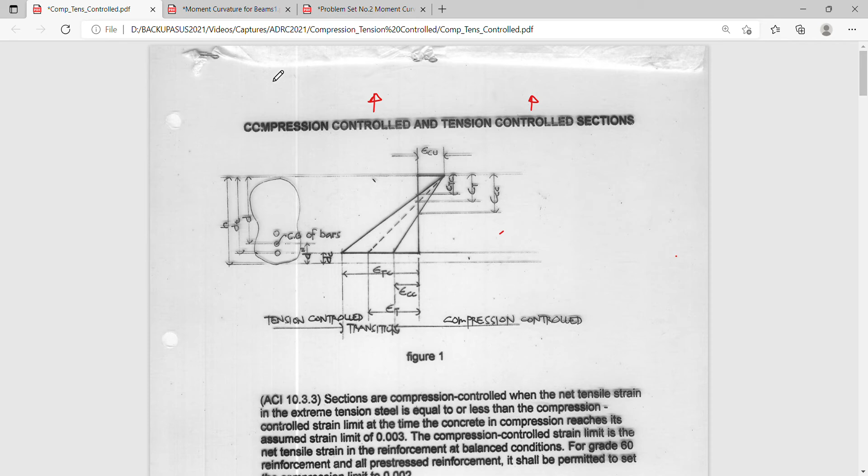So to go into the detail of this topic, if we consider now a beam here, you will notice that I have created three strain relationships in terms of these three lines here, wherein the dotted line here is actually the same strain relationship we are defining in our previous discussion. So this is simply the KD that we discussed in the elastic stage.

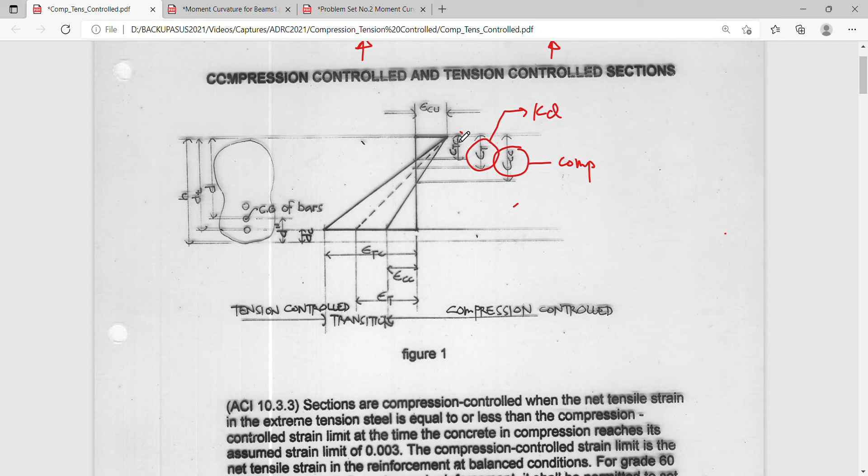But since now we are talking about control, we set aside the use of the parameter KD, since KD only happens when we are on the elastic behavior. So we might as well use the variable C, and the subscript T there simply indicates a control of the tension, the control of the location of the neutral axis with regards to the tension steel provided in the tension region. And we have also the CTC and CCC here, which gives us the basis for our compression control, and CTC as the basis for our tension control.

Okay, so what does that mean? In this particular strain relationship that I plotted now, we see a region of strains wherein the beam or flexural member is controlled by compression. And we also have a region of tensile strain which is controlled by the yielding of the steel. So this is now what we consider a brittle design in our old interpretation of the code, and this is what you call the ductile design in the previous codes that we have studied.

Now, in between, which is this range here, this is what you call a transition. So it's a transition between a brittle and a tension controlled design. Okay, so what does that mean?

In a compression controlled design, this should not happen in beams. This may happen in columns and other flexural members like walls, but in beams, this is not a very good scenario to deal with, because it's really very dangerous.

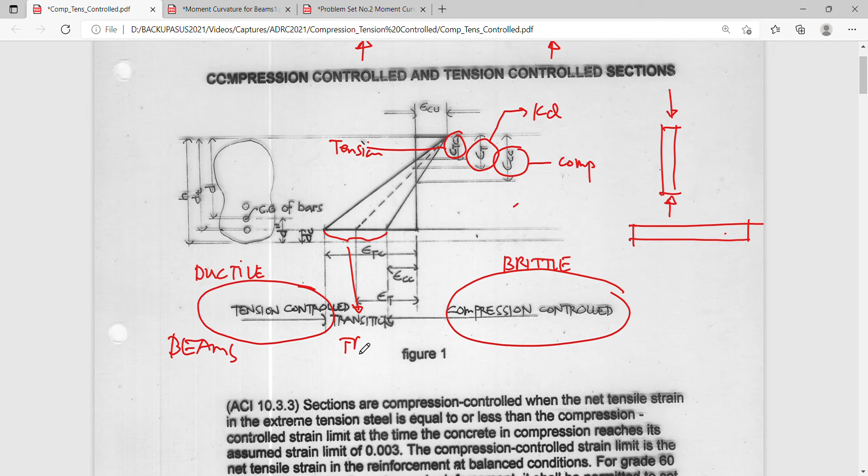Okay, these are my observations, class. Don't quote me, you cannot see this explanation in any book. They don't explain that way because they are just providing us information. We as engineers will be the one to interpret it. But in my own opinion, this is very good for beams, tension control, and this is very good for columns.

Now, in cases where you cannot avoid this region, then this is also okay with columns, as long as you impose a little safety measure here to add up to the ductility requirement. In fact, confinement. Okay, confinement, what is confinement, class?

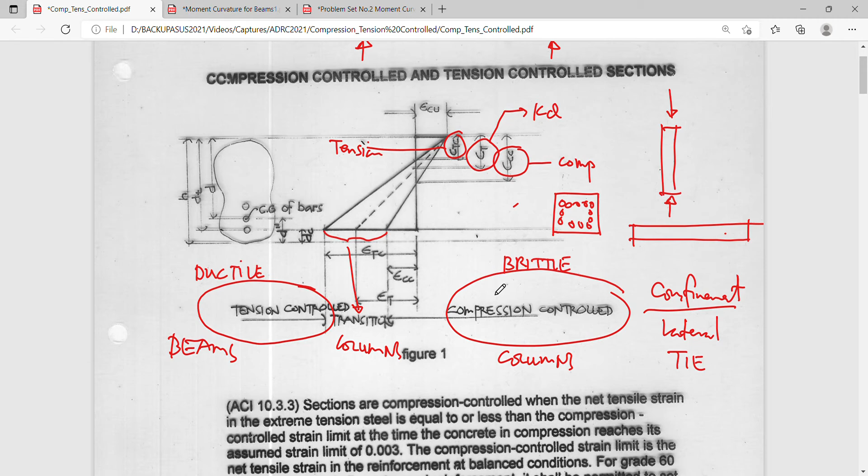So that is, in general, the context of compression controlled and tension controlled sections. And the next discussion is only a matter of interpreting the ACI provisions, and I just extracted this from the ACI, which explains to us what are the specific values to use

in this kind of approach in the design. So in ACI 10.3.3, sections are compression controlled when the net tensile strain in the extreme tension steel is equal to or less than the compression controlled strain limit at the time that the concrete in compression reaches its crushing strain. This is your epsilon CU. So the compression control is the net tensile strain reinforcement at the balance condition.

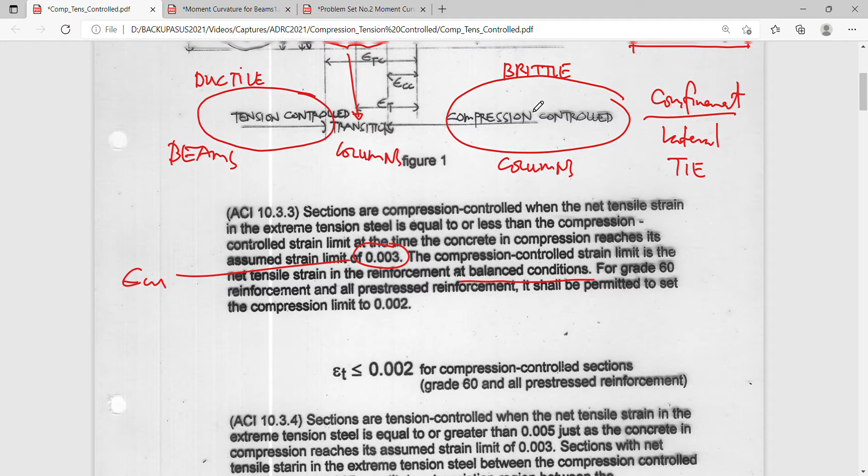This is what I was telling you earlier. This is our balance condition here. This is the limit of compression control, which happens to be 0.002 for a grade 60 reinforcement, and strains are just epsilons.

And when I solve for epsilon, epsilon is simply Fy over Es. So if I divide grade 60 by 29,000 - the modulus of elasticity of steel is 29,000 - so more or less 60 divided by 30,000 is 0.002. That's it.

So this is now your yield, your yield strain, which happens to be the point at which the balance condition is happening, as discussed in our elementary derivation of your rho balance. So for ACI 10.3.4, this discusses now the tension-controlled net tensile strain, which is

equal to or greater than this reference, which is now 0.005. So if this is 0.002, this is 0.005. So this is now your...

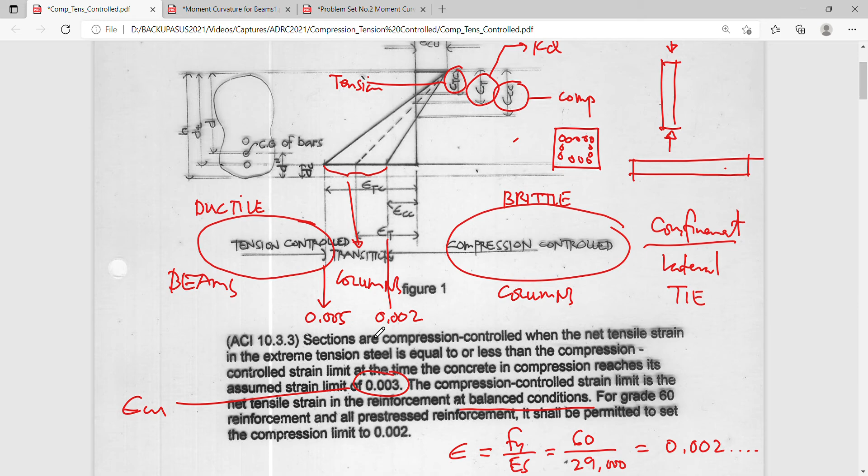So how did they get 0.005? There's no exact basis on how they got it, but I'm sure this was somehow related to your rho max, wherein ductility, the assurance of ductility, was nailed into giving a factor of safety of 1.33 on your rho balance. So there's no exact statement in the code, but I think, and I'm almost sure, that this is the basis for 0.005. They might not give you the same value in terms of analogy, but they are related in terms of context.

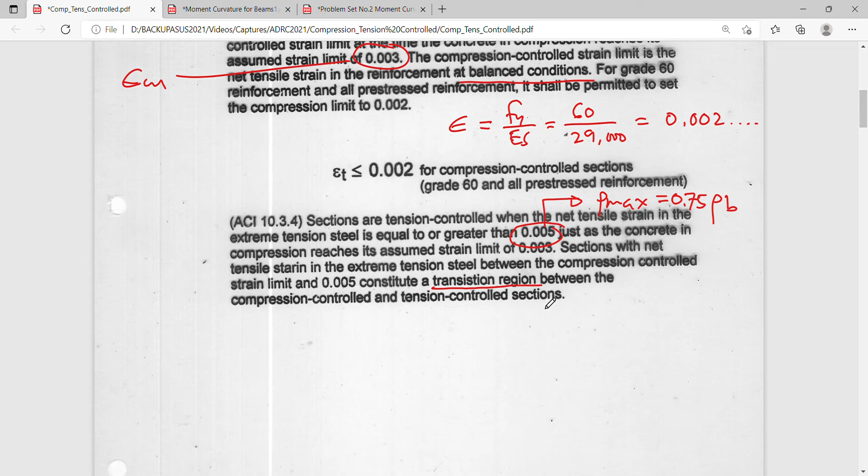Because some were adjusted since the grade of steel happens to be different. You can use grade 60, grade 40, and even grades that are not existent in some codes, you can use them. Like here in the Philippines, we have grades of reinforcement that are passed under the Philippine standard, but they have not all passed the ASTM standard.

Okay, so for non-pre-stress flexural members and non-pre-stress members with axial load less than 0.10 FC prime AG, the net tensile strain at nominal strength shall not be less than 0.004.

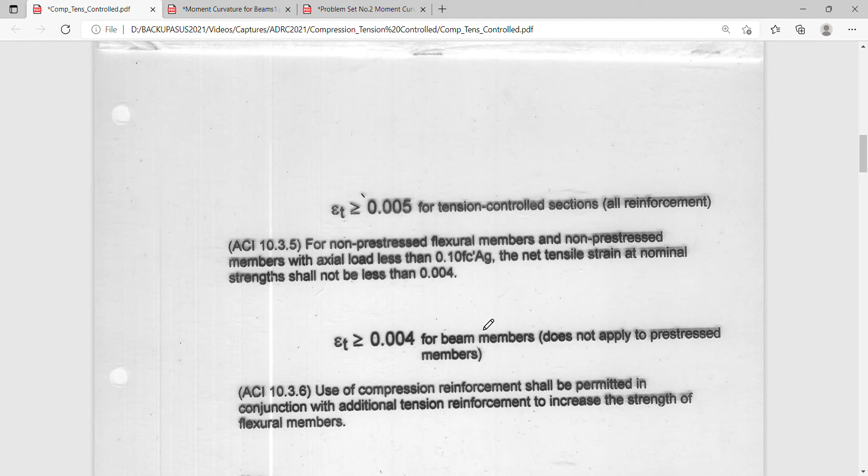So this adjustment happens to focus more on beams rather than other types of members. So the use of compression reinforcement shall be permitted in conjunction with the additional tension reinforcement to increase the strength of the flexural member.

So what we discussed earlier were singly reinforced beams or members. But once you add compression reinforcement, it becomes a doubly reinforced beam, so you have to adjust it. And how to adjust it - if you know the intent of the code, you have to know how to adjust it. Unfortunately, the code will not tell you how to do it.

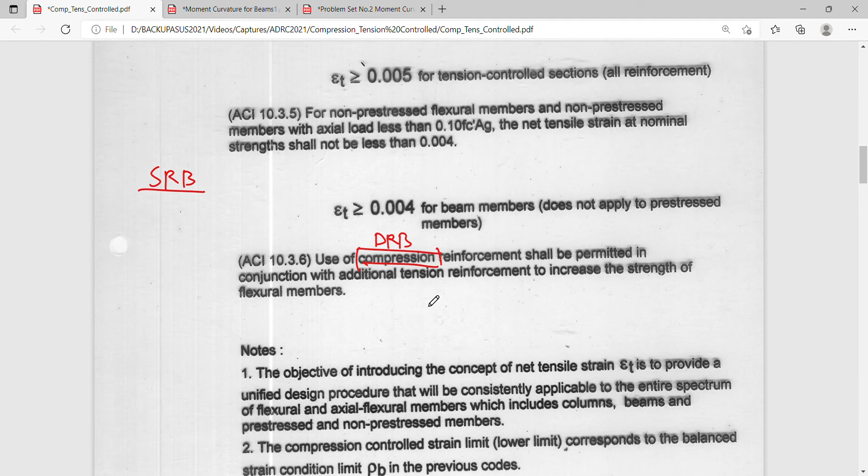That's why you need to really understand the intention and go back to the basics to adjust it. Okay, so later on we'll try to look into that. Notes: the objective of introducing the concept of net tensile strain is simply to provide a unified design procedure that will be consistently applicable to the entire spectrum of flexural and axial flexural members, which include columns, beams, and other pre-stress and non-pre-stress members. So the compression-controlled strain lower limit corresponds to the balanced strain condition limit, Rho B, in the previous code.

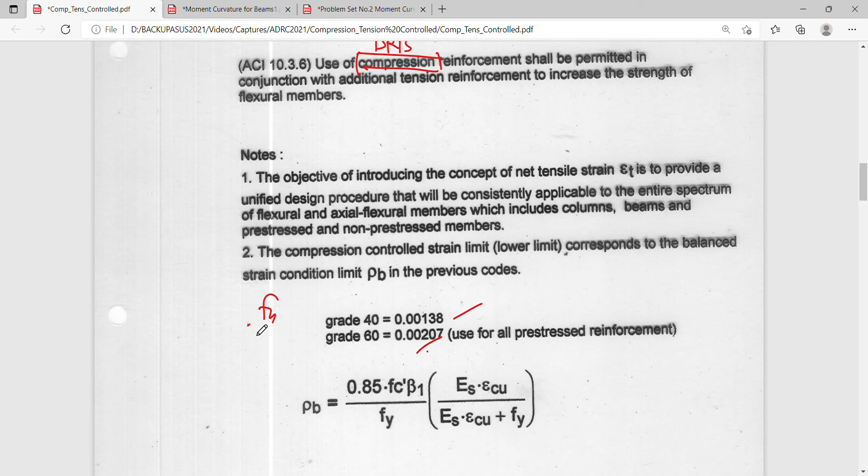So in grade 40, these are the balance strain limits corresponding to the grades of steel. This is 0.00138 and this is 0.002. Again, you simply use the formula Fy over Es to get these values.

So we know that in your design code, referring to it as the most abused parameter in ductility, which is rho balance. This is actually equivalent to 600 over 600 plus Fy, times 0.85 F prime C beta 1 over Fy.

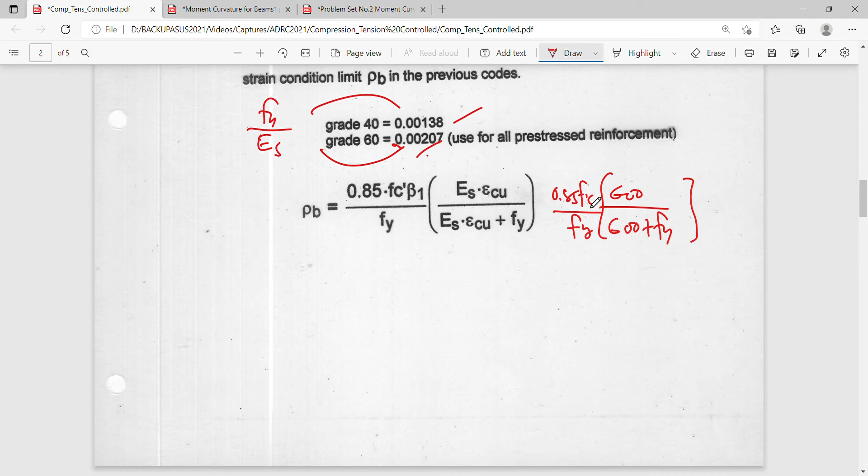So this is the shortcut of the formula. There's a beta 1 in there - you check it out. So this is for SI units.

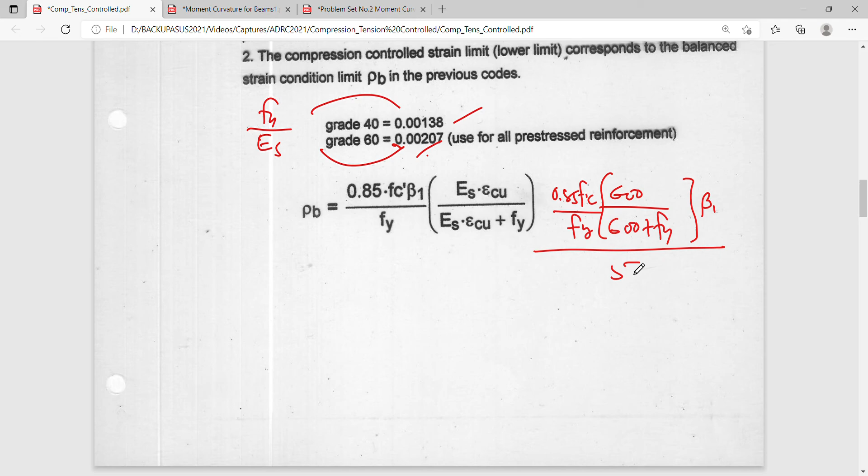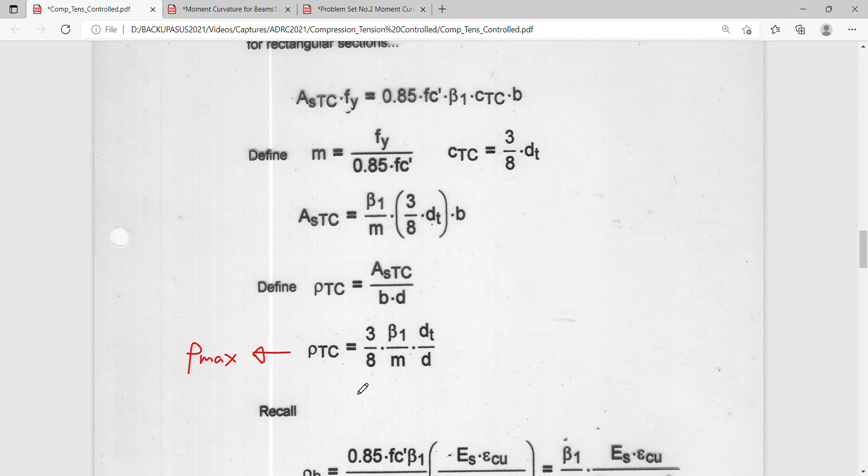Okay, for rectangular sections now, how to derive rho TC. The rho TC here is the basis for your corresponding rho max in the context of compression and tension controlled regions.

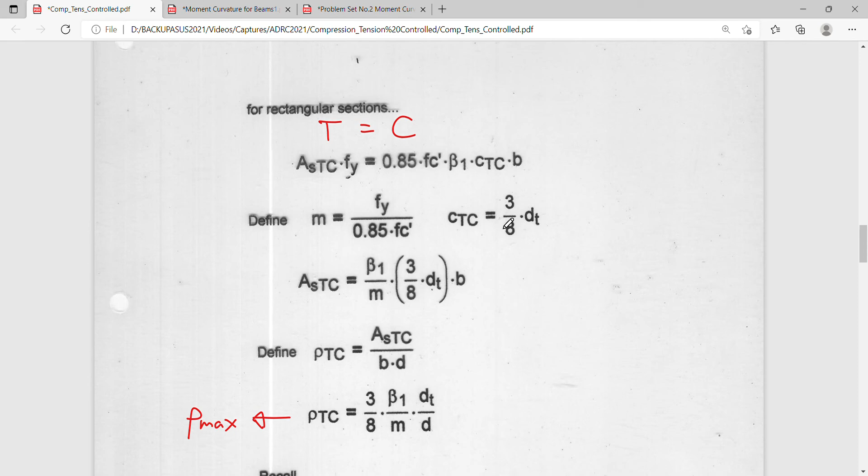So this is now an equilibrium equation - this is simply T is equal to C. Where if we define Fy over 0.85 F prime C as M, and CTC as 3 over 8 dt, how did you get this? Because in the tension controlled condition, we take note that this is 0.003 and this is 0.005. We just make use of a similar triangle approach wherein this CTC is just a measure of the depth on the tension controlled reinforcement dt.

So if you make use of a ratio and proportion, this is now valid as your CTC. So don't be confused - this is just a value of your CTC not at the balance condition, but at the ductile condition, because we are now on the tension controlled condition. This is TC, tension control.

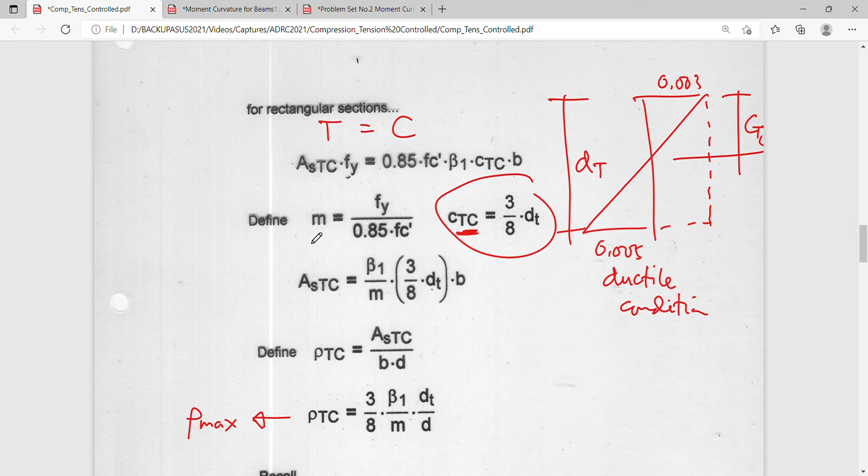So ASTC now becomes beta 1 over M, 3 over 8 dt times B. So if you solve for ASTC here and substitute the values and CTC there, you just get this one. You define rho TC now as ASTC over BD, then this is now the formula for your equivalent rho max.

So now you understand - rho max, this is just it in the context of tension control. So it's not just rho max is equal to 0.75 rho balance.

And if you are going to solve for what is the multiplier here, you can just manipulate. If I ask you in the exam, what is the equivalent multiplier in this equation with that of rho TC? I hope you can do it, because that's just a mathematical question.

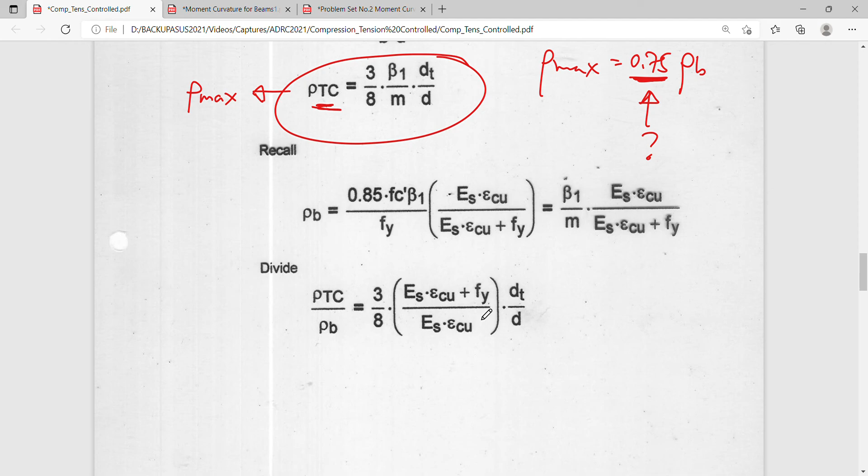Okay, so if we recall rho balance now and divide rho balance by rho TC or vice versa, what are we getting now? Our comparative multiplier, which is this one here. But class, I want you to double check this, because in my previous lecture on this, it seems someone questioned that I made a mistake.

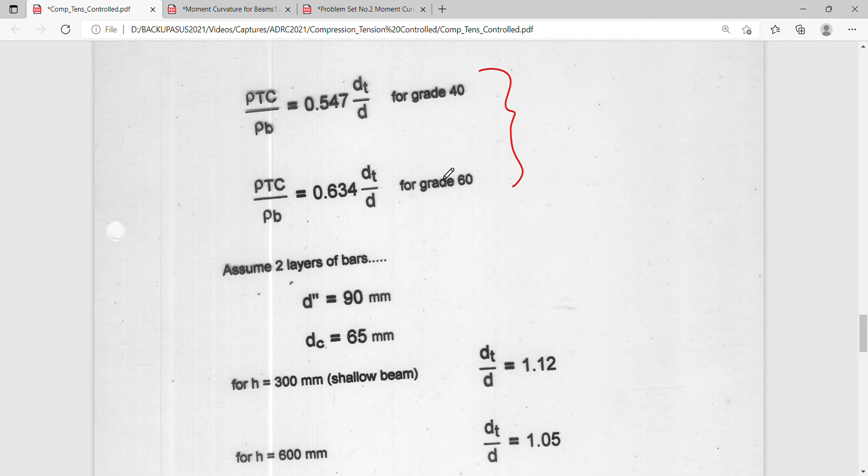I'm very glad to admit my mistake, because sometimes these kinds of errors are brought about by how much you're thinking about and working on. The important thing is you don't make an error in the concept. So please check this.

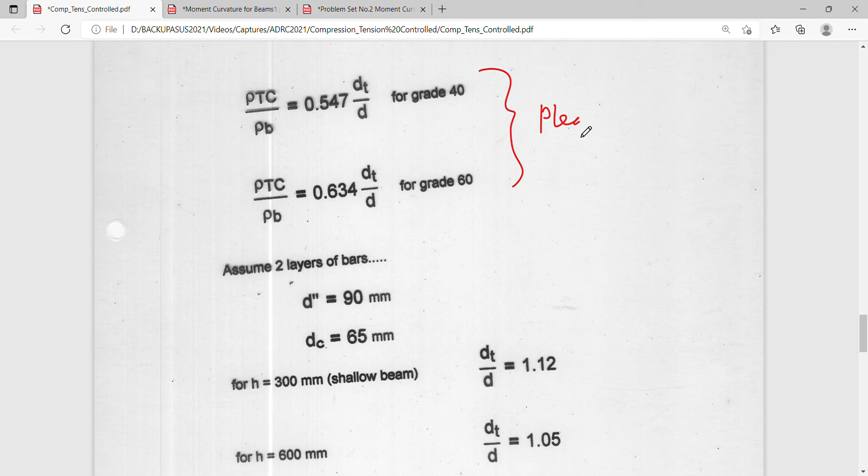If you notice, which one is more ductile, the new approach now, or the old balance approach, or the old TC approach? If you make use of this, which is less than 1, you'll notice that your rho TC is smaller than your rho max, because this isn't 0.75 anymore.

I don't know if my interpretation is correct, but these are the things I asked in the examinations again, and I want you to think about this, because these lectures are not lectures from the book class. These are lectures I made when I was still starting to teach this master's degree, based on what I learned when I was still studying.

Okay, so this assumes 2 layers of bars. D double prime is equal to 90, and DC is equal to 65. So why are we talking about layers? I'll explain to you why.

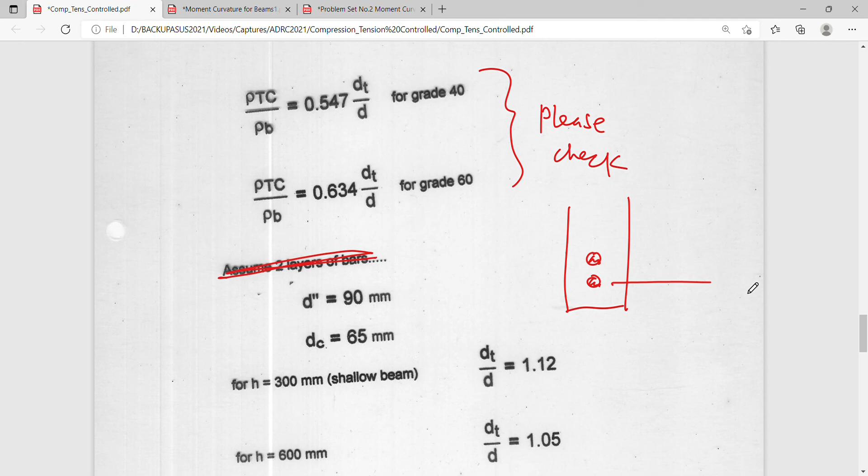This is the reason why. If I have 2 layers here, my epsilon TC will be measured on the extreme-most fiber. That's where we measure the epsilon, not in the middle. It's at the extreme-most, not in the middle.

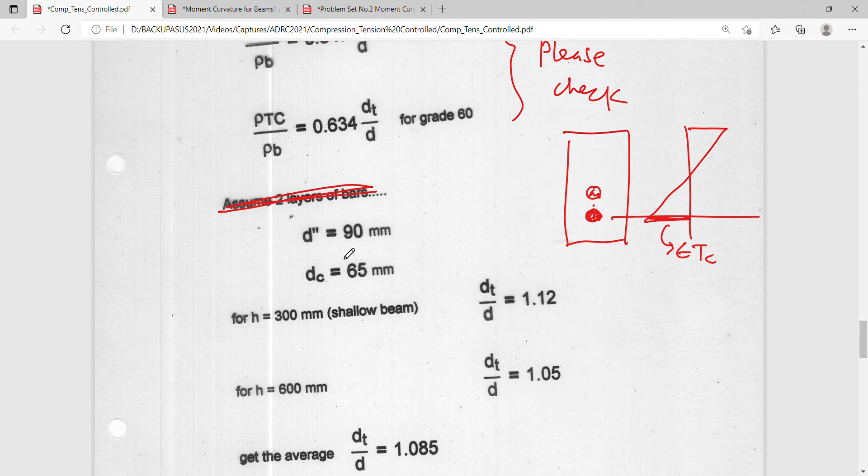So we need to really take a look at this layering. And D double prime 90 is this one, that's our cover at the centroid. These are D double prime and DC is this one. Sorry, this is DT. The DC is for the compression bar, if there is a compression bar.

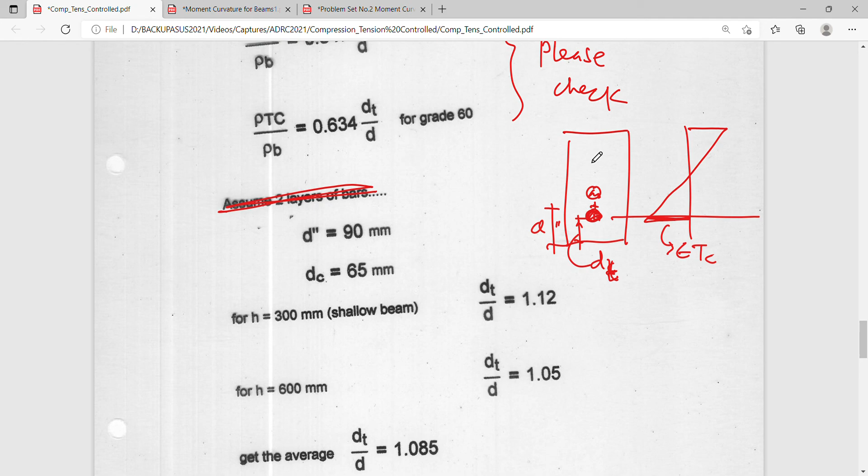So if DT over D is 1.12 on the basis of this formula, how do you apply it to these parameters here?

Okay, so this is for a shallow beam, and this is for a not-too-shallow beam. It's not a deep beam, but it's a regular beam. So these are suggested values, I think.

If we take a look at the actual values, these are the actual values. Does it fall on this or this? So you just take the average. In actual problems, you have to check where it falls, but here, since we are deriving a formula, we just take the average of the two.

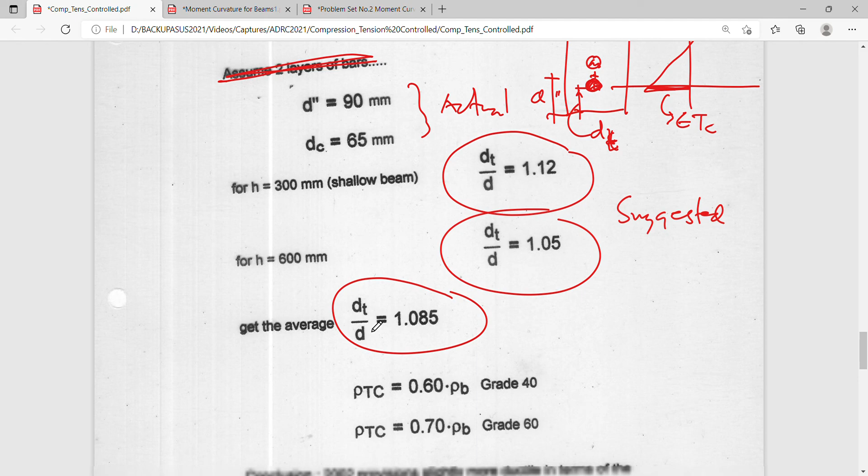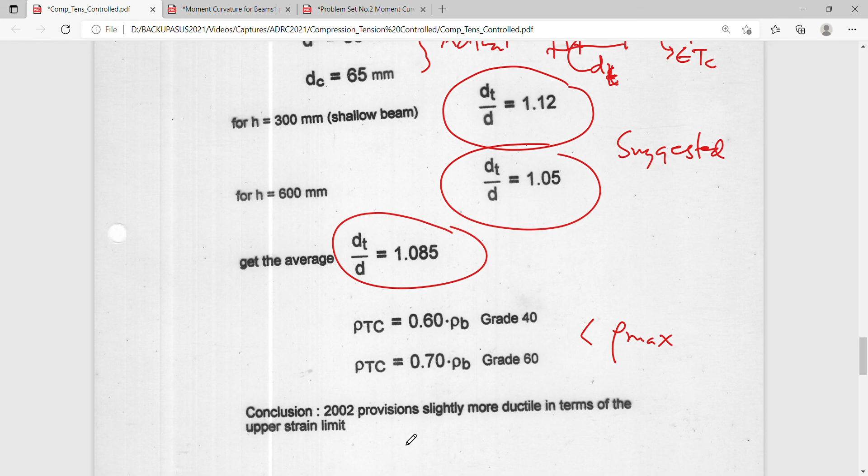Take note of what happens: your rho TC becomes 60 and 70 percent of rho balance for grade 40 and grade 60, still less than the rho max of the previous code. The conclusion is that the code which introduces this approach, I think started in 2002, is slightly more ductile in terms of the upper strain limit.

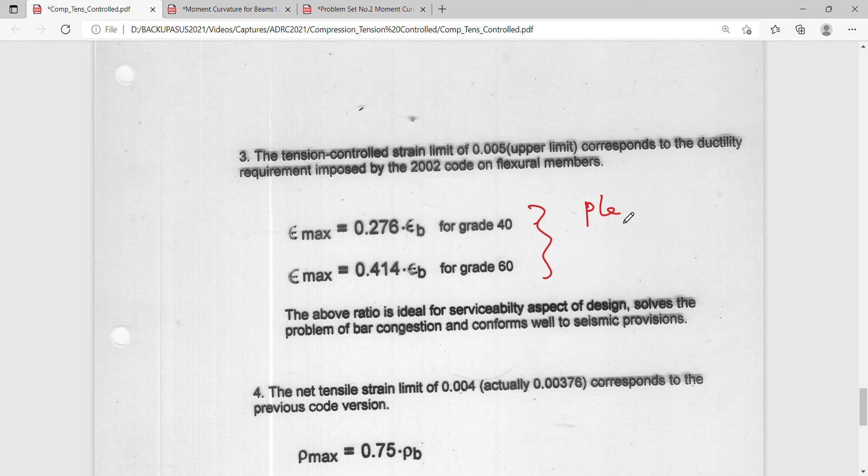Again, I have here some comparison on the epsilon maximum. Please verify this. As your assignment, I will ask somebody to verify if this is correct or not, because I doubt this is the old lecture that I have.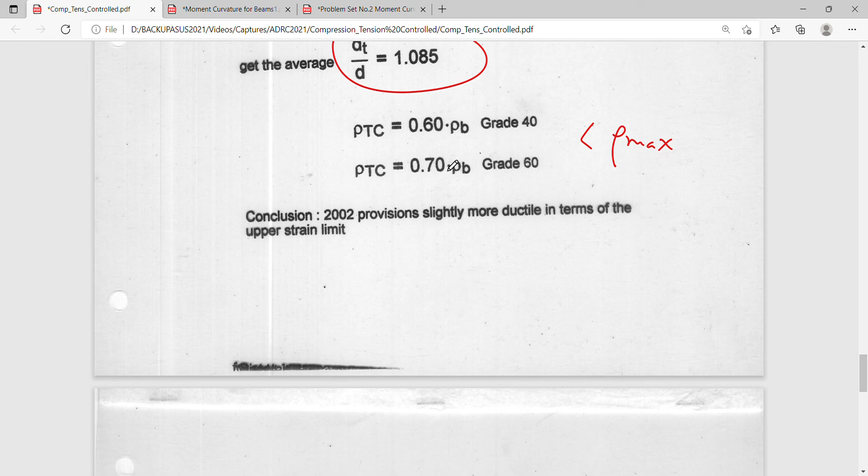The above ratio is ideal for the serviceability aspect of design, and it solves the problem of bar congestion and conforms well to seismic provisions. The result is good when you use these values - you won't have bar congestion problems, and serviceability-wise, you won't have problems, etc.

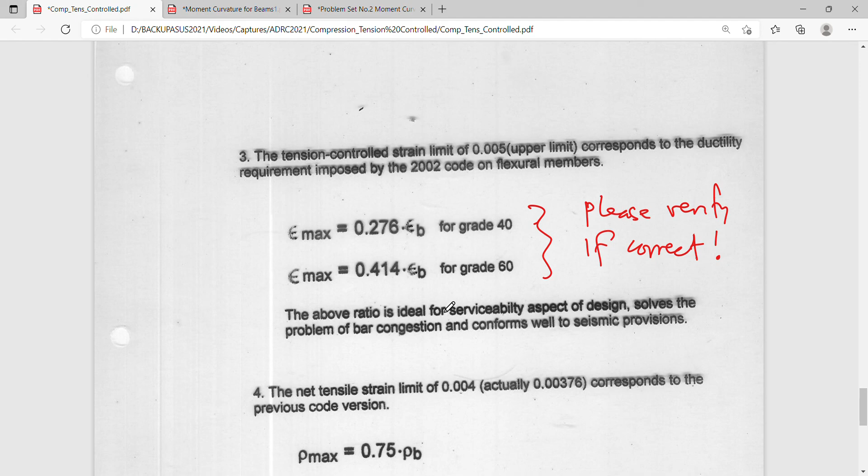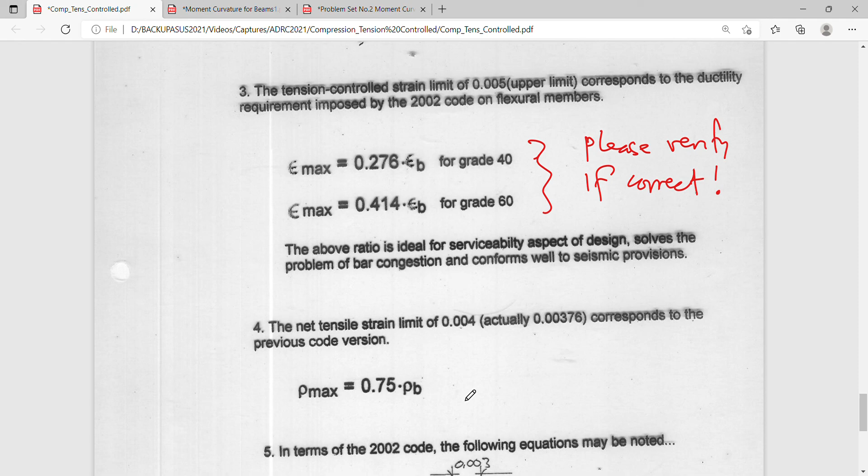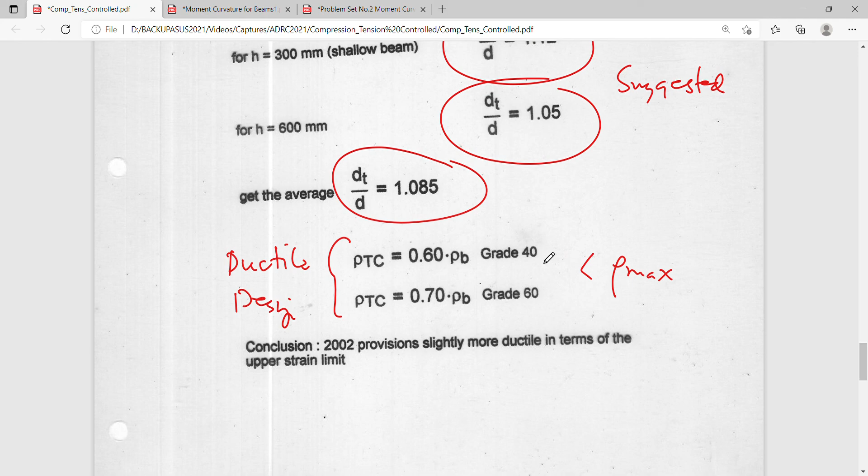The net tensile strain limit of 0.004, which is actually 0.00376, corresponds to the previous code version of 0.75 rho balance. So this is now the previous version, and these are the new version for ductile design. But in earthquake provision class, it's even lower, 0.5 is used. These are just for ordinary design.

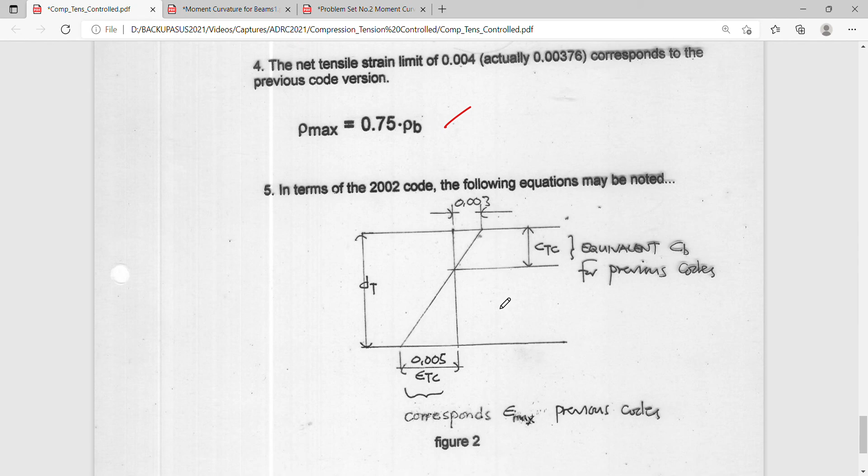In terms of the 2002 code, the following equations may be noted. Again, this is just a derivation of the 0.003 and 0.005 scenario in your strain, and this is equivalent to CB for previous codes. This is just a figure which relates also to these computations above.

I hope I have shared with you some very important contexts or concepts which are not new, but rather a little bit vague and unclear to us when we design flexural members in terms of ductility. Thank you very much for listening, and I'll see you in the next video.